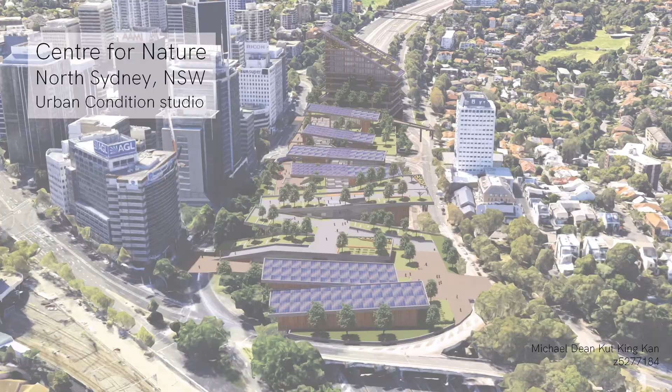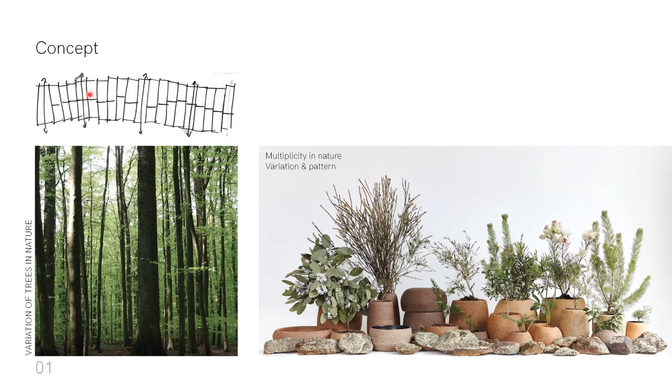The concept for the design has been inspired by Lian's artwork and poetry through her use of organic shapes and materials, which translates the multiplicity in nature from a basic element into an ecosystem of design. The sketch here shows the intention of this multiplicity.

The site analysis has enabled us to come up with factors that inform the design scheme. For example, having the traffic mapped, which enables us to see that this needs to be raised, and the existing greenery that needs to be preserved. The steep edge condition, which can be challenging, has also been identified.

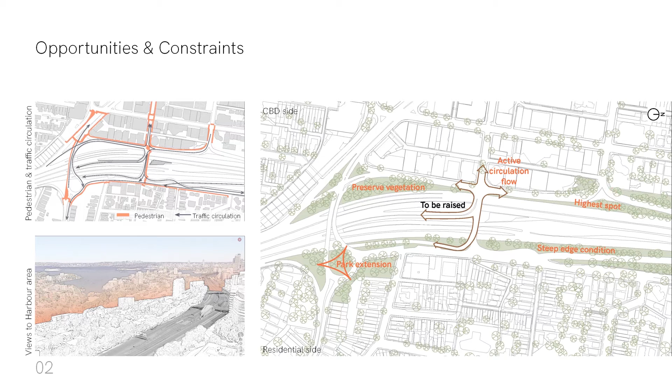Placing these elements into spatial context, the links become obvious, where existing circulation and gathering patterns create nodes which need to be considered. The character along the site makes for three types of spaces: knowledge, active, and passive. For example, the Center for Nature is more along the green area, with a strong link access active with the shops along it, and a more passive area for the apartments.

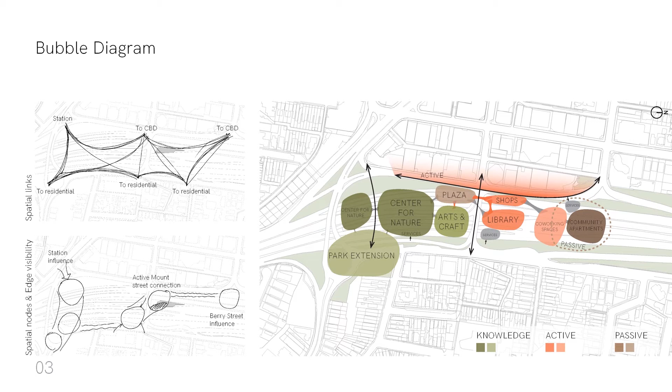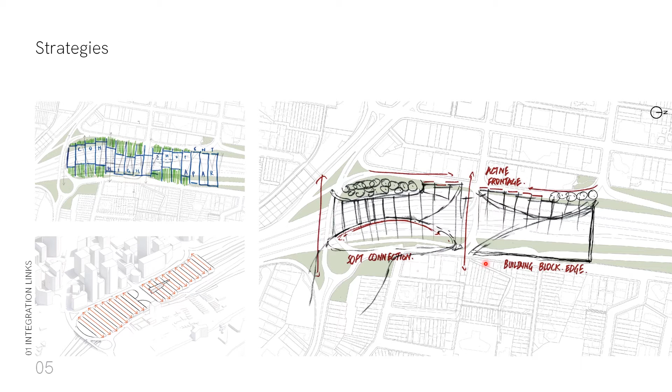By combining the analysis, observations, and concept together, the strips are a device for integrating the links from the CBD to the residential area, the active frontage of Arthur Street, the connection for the park, and the building edge for the apartments. Through the careful placement of the strips through the vegetation, the green has been preserved and added on the roof as public spaces where functions have been added to it.

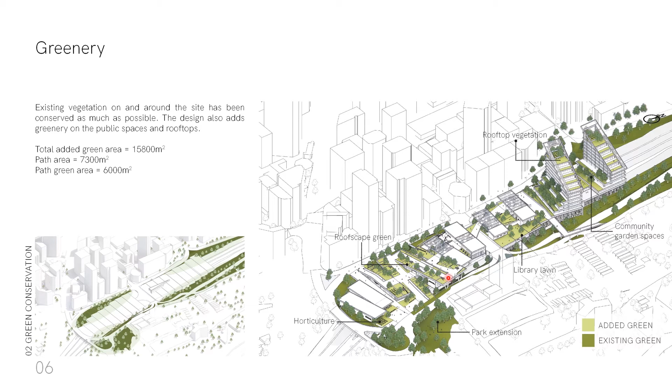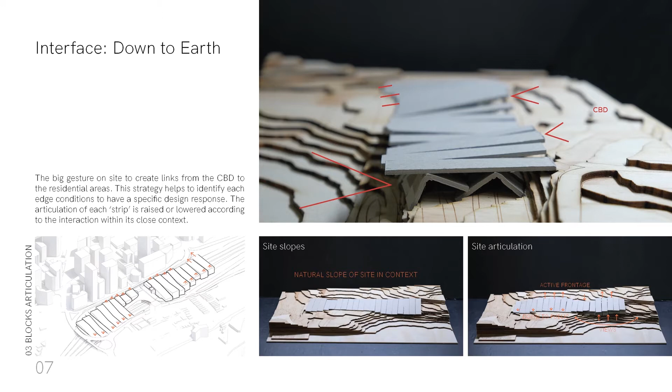The articulation of the design is important to clarify the intention of the building to fit its context of the slope and fabric. The strips are raised or lowered according to the activity, like shops being more active, and connectivity to landscape where it's lowered down.

Adding another layer to that, the scale of the strips fits the existing context with their active facades interacting, creating pockets of spaces between them. Also, the structure is integrated with the building with articulations, retaining walls, and columns at strategic points.

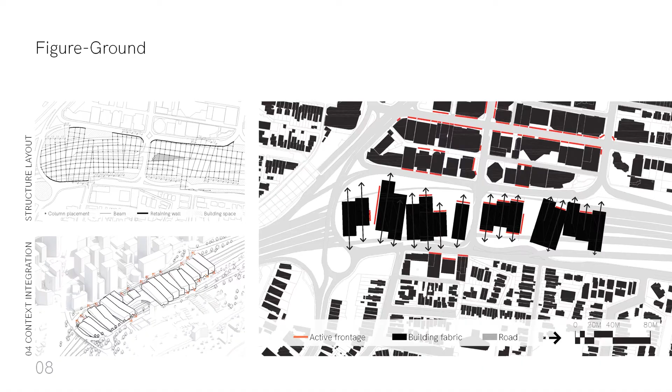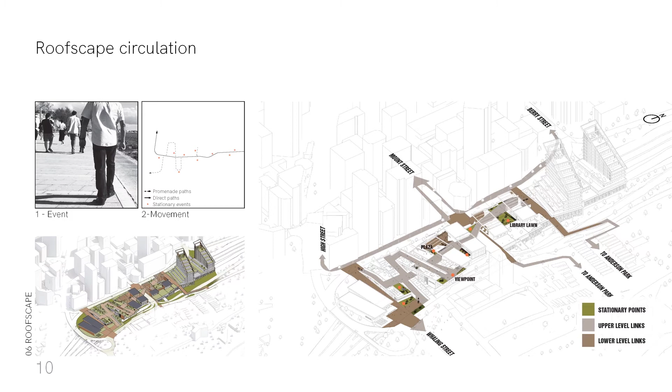The streets and access around the site create a network of links. People have the choice of going through the site or experiencing the promenade with functions located around them, shown here as stationary points. Here's a summary of how, from the beginning of analyzing it, vegetation, articulation, functions, and integration all come together to create the final design.

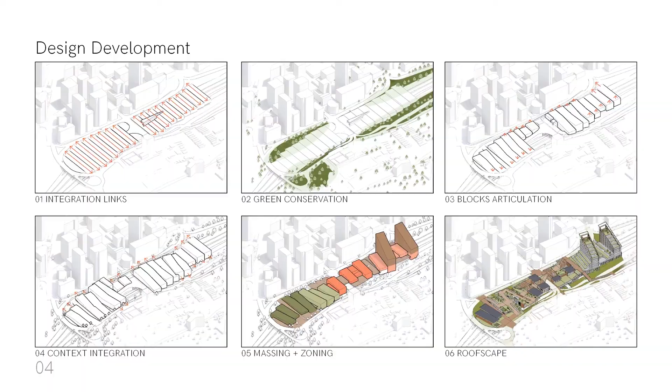A strong emphasis has been placed on the connections to the site, where the five main entrances cross the streets around. The same pavement material has been used on the roads to give priority to pedestrians, creating a matching edge condition to the surroundings.

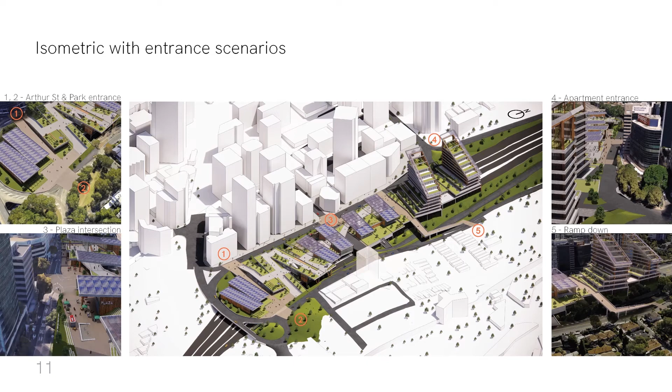The whole scheme has been categorized into three phases. Apartments and co-working spaces will make the project profitable to support the construction of the next phases.

The floor plan: the horticulture workshop on the left, workshop, arts and crafts all form together the Center for Nature with overlapping spaces. The plaza with seatings creates a welcoming gathering spot, and commercial spaces along it lead up to the co-working spaces. These co-working spaces and apartments have their own entrances and service access.

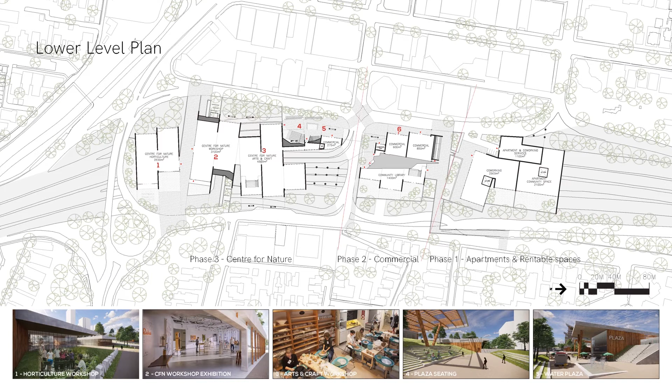On the roofscape promenade, the layout creates sticky spaces with functions such as commercial, exhibition of arts and crafts, and a library forming part alongside it. The apartments have their own rooftop spaces for residents to use for recreation and gardening.

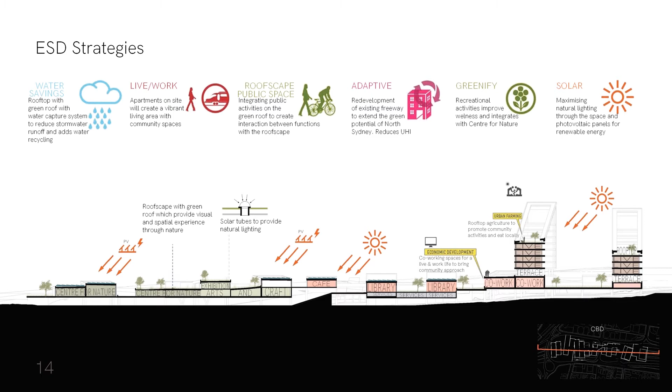The whole scheme, shown with this long section, has an overall ESD strategy, mainly dealing with passive design to reduce energy consumption and improve thermal comfort with greenery and public spaces. The community living and co-working creates a whole complete ecosystem of the site and community.

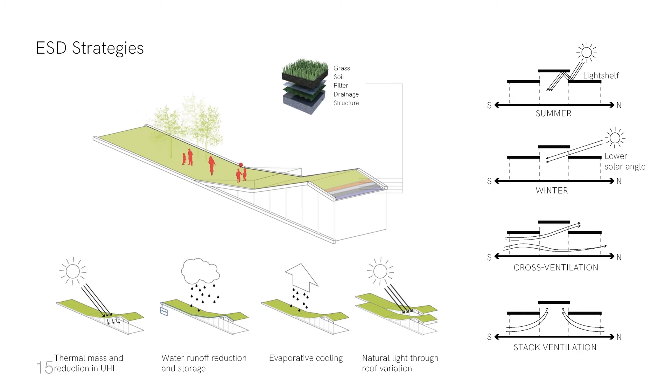Zooming in on each strip, the ESD elements of the green roof help improve energy efficiency through natural lighting, ventilation, insulation, and water recycling for the roof. This will help improve thermal comfort and also reduce energy consumption.

The sloped roof gesture makes it fit right into the context, with the right side being higher towards the CBD and the left side being lower towards the residentials. This will help match its context and also prevent overshadowing in the morning with the slope going down.

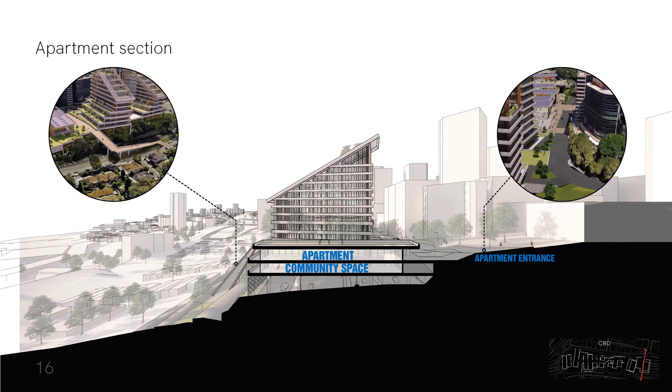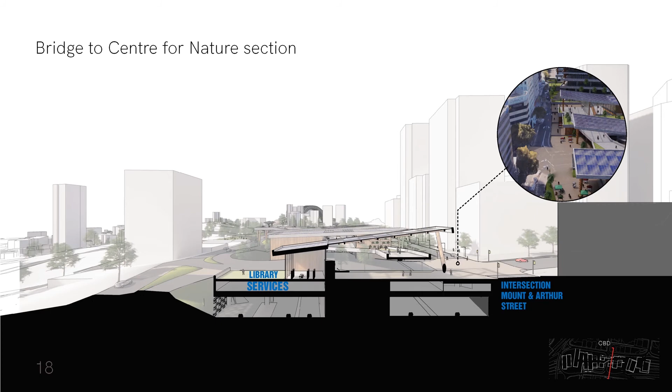Here is shown the intersection of Mount Street and Arthur Street, and the roofscape bridging over Mount Street onto the southern side of the site. The height enables a whole flow of services for all the functions happening above.

This section through the plaza shows the public space with seatings going up to the roofscape. This bridges over the highway ramp to allow enough clearance for the cars.

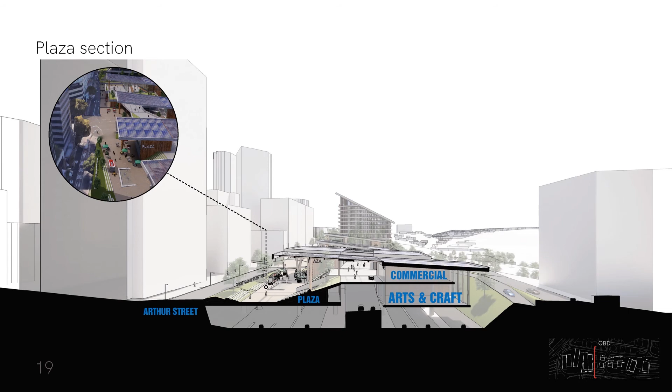The section through the longest roofscape span here shows the viewpoint on the left and the slope down with an access to the exhibition areas. The extending roof over the existing vegetation on the left and right brings an immersive experience of nature.

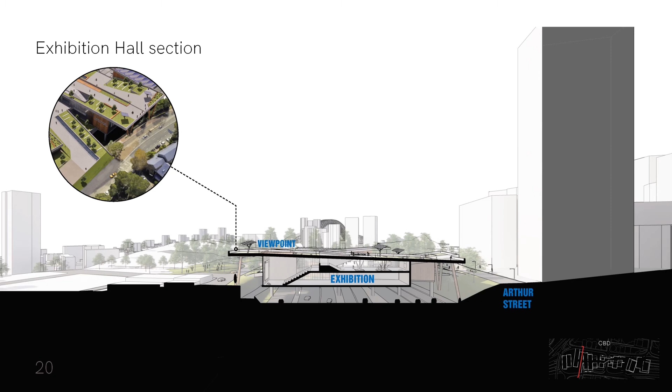So here's the lowest spot of the site for the section here, and we can see these two accesses being very integrated with the context, with the park on this side and Arthur Street on this side.

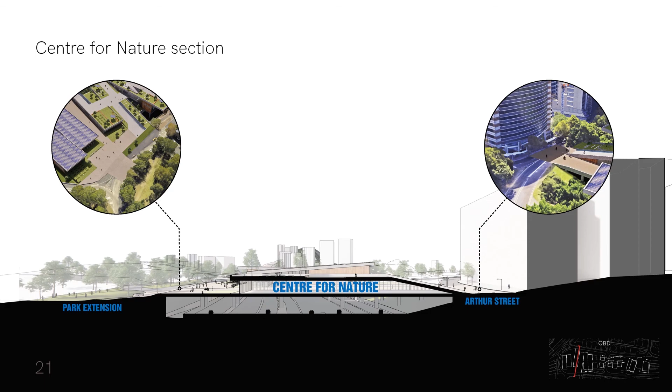Here is shown the model explorations of the interactions of each strip to the context. Buildings with higher massing have been placed on the right to allow views of the CBD to the harbor.

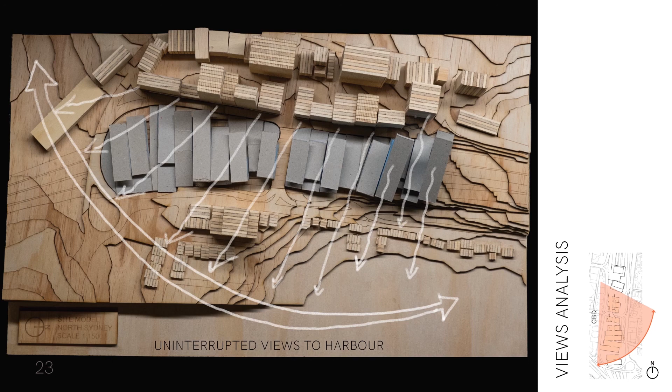The building strips have openings facing north for lighting, and building masses have ample daylighting throughout the year.